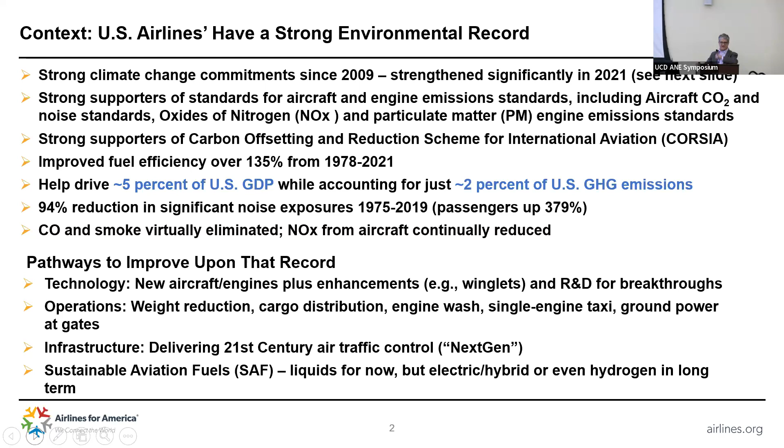So we've got some basic ways forward here that should be fairly familiar to folks about how we attack environmental impacts. That's improved technologies, improved operations, improved infrastructure. But what I'm going to talk to you about is SAF, Sustainable Aviation Fuel.

Just to let you know, in the background here, we adopted a net zero carbon goal in 2021, in March of 2021. So it's a net zero carbon goal by 2050. And that initially was accompanied by a goal to reach 2 billion gallons of sustainable aviation fuel by 2030.

And the reality is that is the best lever we have to reducing emissions going forward. Operations will help, technology will help, but when you look at what's really going to bend the curve down towards zero, it's ultimately going to be a lot of SAF. So in September of that year, we also then increased that goal to 3 billion gallons of cost competitive SAF in 2030. And we really led the world in doing this.

So the IATA, the International Air Transport Association, followed later in September, and actually the US government just adopted a net zero carbon goal later as well. And the International Civil Aviation Organization, ICAO, adopted a net zero carbon goal, an aspirational goal, just in October of last year.

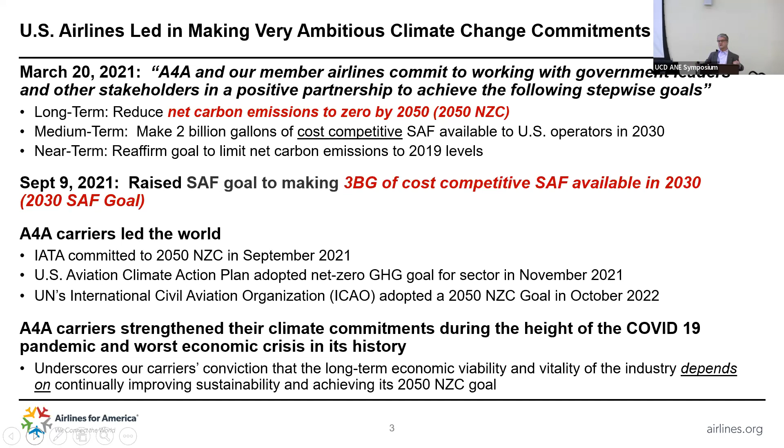So another point here is we were doing this during COVID, which was really one of the worst economic times for our industry. And when COVID first hit, the thought was perhaps that there would be less pressure across the industry and not just aviation. And people would think, well, maybe environment needs to take a bit of a back seat as we recover. Nothing could be further from the truth. We just re-upped our commitment to the environment, understanding that we need to make sure that as we progress economically, that is in lockstep with progressing environmentally as well.

So you see here, this puts our net zero carbon goal and the relationship to our SAF goal in perspective. We're talking about a really, really difficult goal to achieve. We had about 15 million gallons of SAF produced in the United States last year, or available to carriers in the United States last year. So to get to 3 billion gallons, do the math, 200-fold increase. It's 94% increase every year from now through 2030.

I always joke, if I could find an investment like that, I sure wouldn't be here. I'd probably be somewhere else enjoying the fruits of the investment.

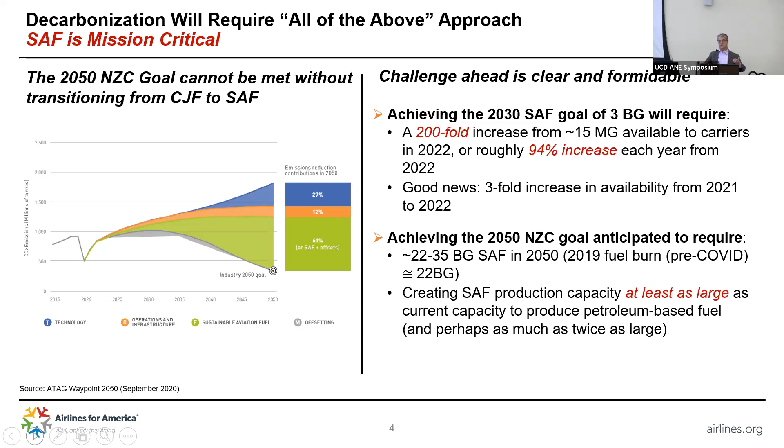But so this is going to require getting about 22 to 35 billion gallons of SAF by 2050 to meet our net zero carbon goal. So we're talking about creating a production industry that's at least as large as the production that we have of traditional fuel today. It's a huge undertaking, but one that we're absolutely committed to.

The good thing is that we're doing this in partnership with our friends across the aviation sector, including with consultations with environmental NGOs, aircraft and engine manufacturers, airports, but really the government needs to be a strong partner to really make this happen. And thankfully, we're totally aligned on what the goals should be, the net zero carbon by 2050 and the SAF goal by 2030 and beyond. And so we are definitely doing our part to try to make this transition.

We've got various carriers with goals of getting 10% of their overall fuel use powered by SAF in 2030. Some have even gone as far as 30%. We're already taking delivery of SAF, even though it's about 2 to 5 times more expensive than traditional fuel at the moment. We're working across our value chain to partner with our corporate customers and other customers to help find ways to better finance this, because it really is more expensive. So there are various things that we're doing to really press this along as much as we can.

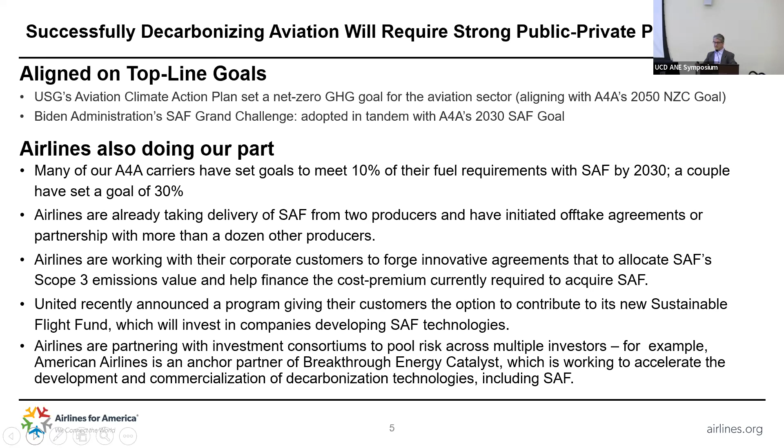As I said, there needs to be a strong partnership with the government. And as Don pointed out, in the Inflation Reduction Act, we got some really good incentives for SAF producers. So these are tax credits that go to the producers of sustainable aviation fuel. They get a tax credit of $1.25 per gallon that can rise to about $1.75 per gallon if that fuel achieves a 100% reduction in greenhouse gas emissions compared to traditional fuel.

You see that in order to even qualify, you need to have a fuel that reduces emissions by 50%. That's the basic threshold. And that's the basis of our goal as well. We're talking about using SAF that achieves at least a 50% reduction in greenhouse gas emissions from these fuels.

So there are also grant programs that were included in the Inflation Reduction Act that help with SAF. But frankly, this is a fantastic first step, but these will need to be augmented to really give SAF producers and investors the signals they need to make the decision to sink what really is going to be billions of dollars into this new industry. So we'd like to see these tax credits extended by 10 years from the time a facility goes into production. That's going to help draw in the private capital that's needed to really make this happen.

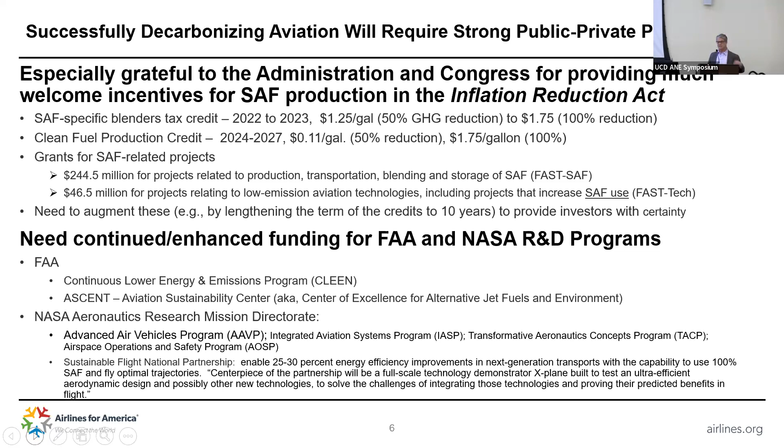So I just want to say that even with the transition to SAF, SAF basically allows you to reduce the life cycle carbon emissions from your aircraft. And you might think, well, then you can burn as much of it as you like. Well, the reality is, as we have been motivated for many, many years, we want to burn as little fuel as possible. If we didn't have to pay for fuel, that would be wonderful. So the least amount we can use is perfectly fine with us. So driving technologies which will improve fuel efficiency is really going to remain a primary focus of ours going forward.

In this context today, I did want to point out, and I think Shruti will get to some of this, that there's basically no sulfur in sustainable aviation fuel. There are also other components that are not present in SAF as well, a component called aromatics. Basically, it allows the fuel to burn more cleanly, so it produces less soot, which means less particulate matter. So that's a very good potential health benefit by ramping up our use of SAF.

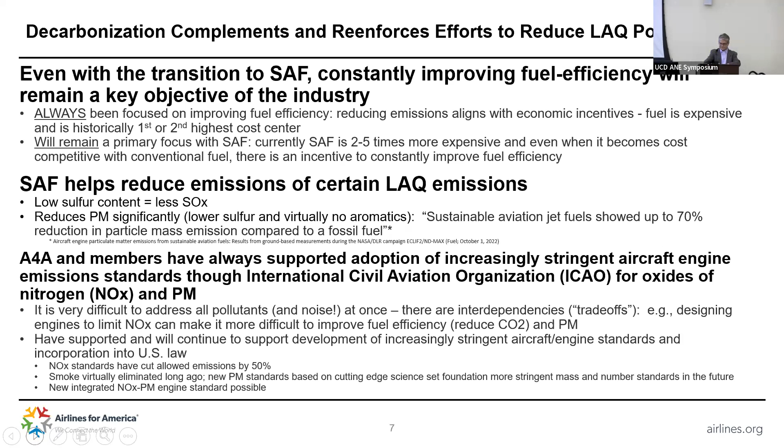Our next speaker is Dr. Shruti Mishra. She is a senior member of the technical staff at Sandia National Labs. She completed her master's and PhD degrees at the Ohio State University, where she trained as an applied economist. Her work includes energy economics and ecosystem services valuation. As a Fulbright scholar and employee at the U.S. Department of Energy National Labs, she's also worked for the U.S. Geological Survey and the World Bank.

Dr. Mishra works at the interface of energy, environment, climate change, and economic analysis, where she is coupling biophysical models with economic models to generate information on the economic costs and benefits of energy innovations. Her analysis goals are to support the assessment of economic viability and environmental sustainability of energy technology and innovation. And in this symposium, she will share with us her recent work on the evaluation of the health benefits associated with the use of sustainable aviation fuel.

Hello, everybody. I'm working right now at Sandia National Lab, and at Sandia National Lab, they do a lot of work on these fuel molecules and techno-economic analysis, how to reduce the cost, how to improve the molecules itself, how to do the LCA, life cycle analysis. So they are doing work on different aspects of sustainable aviation fuel. And the work that I am going to present is a very small part, just looking at the health benefits of sustainable aviation fuel.

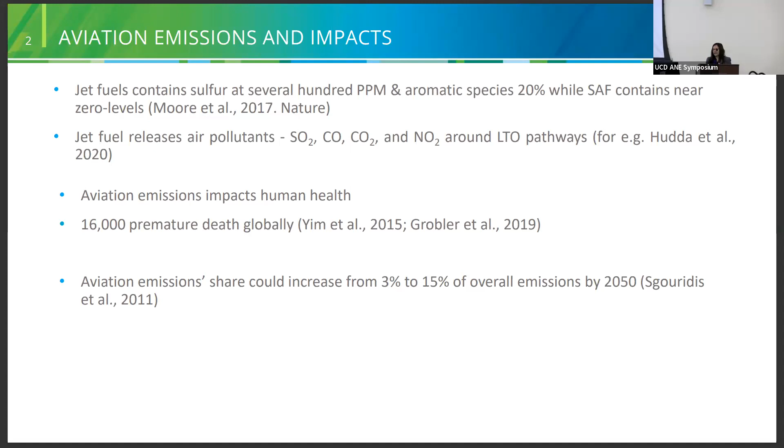There are a number of studies which have already quantified how many premature deaths happen because of these aviation emissions, and also in the context of increasing share of aviation emissions from 3% to 15% of the overall emission, it's important to look at whether and how sustainable aviation fuel can be a part of the solution.

A number of studies have quantified how blending of sustainable aviation fuel into jet fuel could reduce air pollutants. For example, Benosa et al. quantified under different blending, 50% and 100% blending of sustainable aviation fuel produced from different conversion pathways, how much of particle number emission can be reduced. So it goes all the way from 20% to 90% reduction.

And some studies from Harvard, such as Arter et al., have quantified how the reduction in air pollutants by SAF use leads to reduction in mortalities and morbidities. So the benefits of sustainable aviation fuel not only include the decarbonization or reduction in greenhouse gas emissions, but also the co-benefits, which are health benefits from improved air quality in the LTO pathways.

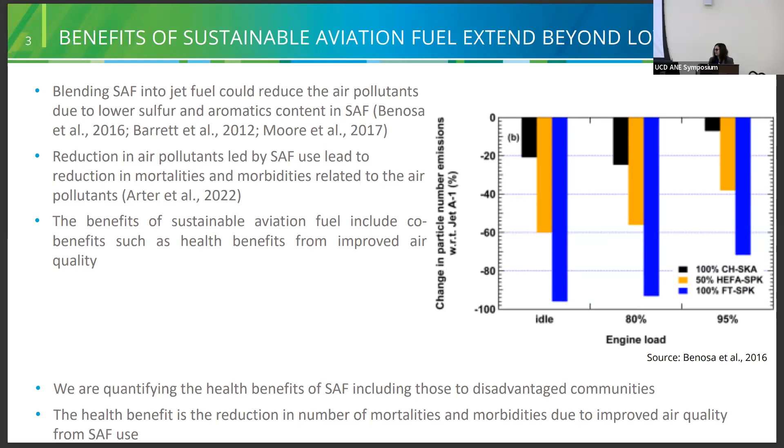So today we are going to present how we can quantify the health benefits of sustainable aviation fuel. And we also try to disaggregate those benefits to the disadvantaged communities as well. And by health benefit, we are looking at the reduction in the number of mortalities and morbidities due to the improved air quality from SAF use.

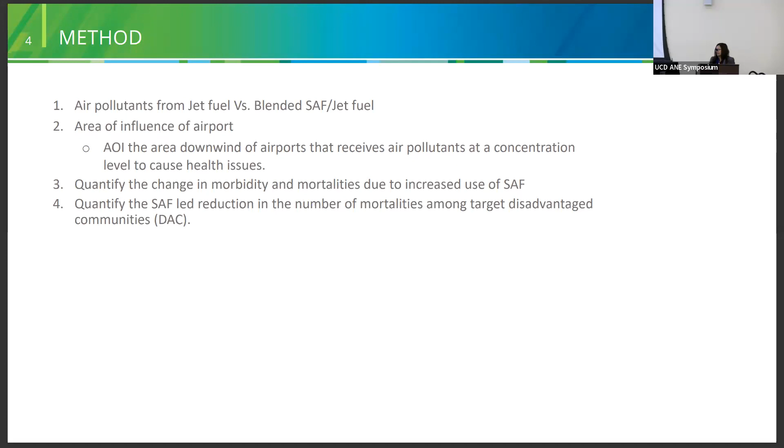So we developed this method, which has 4 main components. We try to quantify the air pollutants from using jet fuel versus using the blended SAF and jet fuel at various proportions. Second part, we try to look at the area of influence. Third part, we try to quantify the change in mortality and morbidity due to increased use of SAF. And fourth part is the quantification of SAF-led reduction in the number of mortalities, including those in target disadvantaged communities.

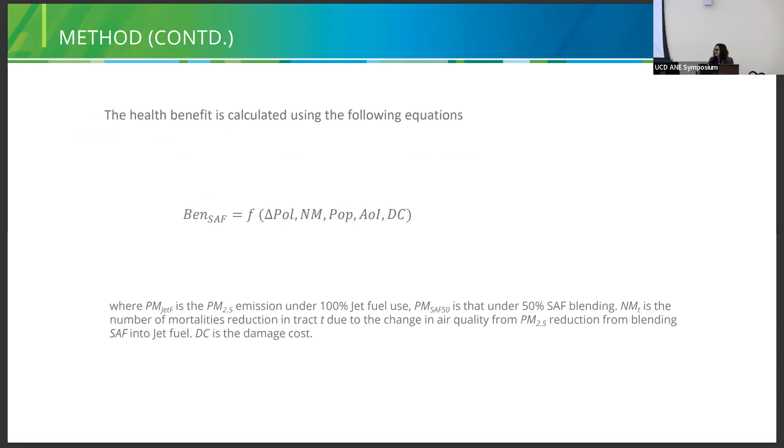So this is the equation we used to calculate the health benefit, which includes the change in pollution, change in the number of mortalities around the population living in the area of influence, and the damage cost. So we are going to look at each of these components one by one.

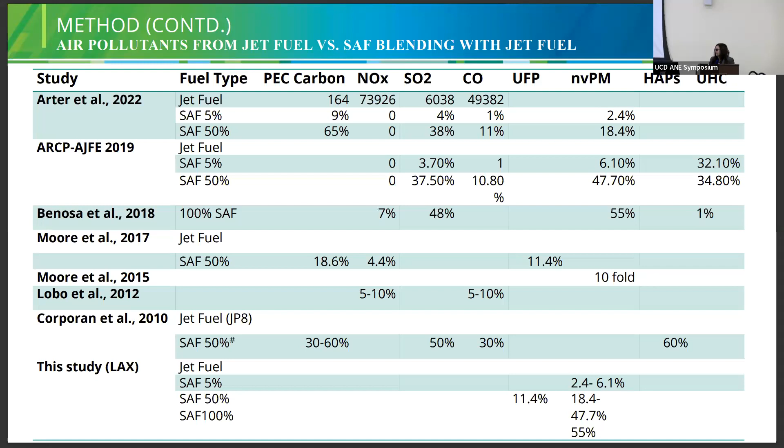So initially, we thought maybe we could use the results from other studies, but then we also found this airport air quality manual, which is developed by ICAO, and they use this first order approximation method to quantify the emission indices. So we tried to use the same method to first quantify the total baseline particulate matter from the airport around the LTO pathways of that airport. And then we also calculated the particulate matter from SAF using the same equation, where we used the value of fuel sulfur content as 0.

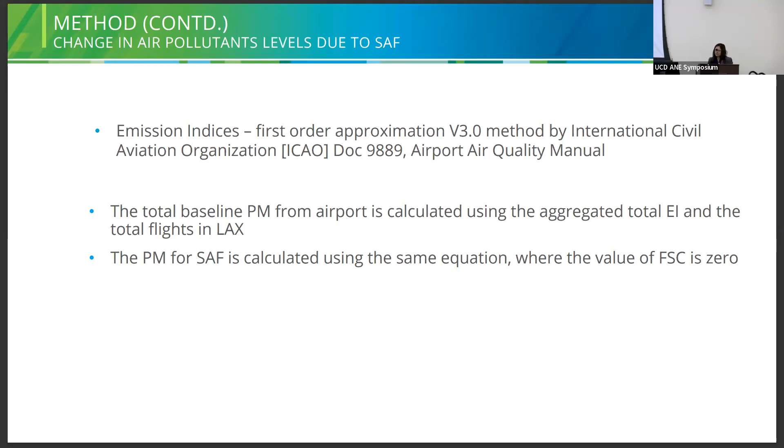In terms of the area of influence, prior studies have found anywhere from 7 kilometers to 40 kilometers as the area of influence for the particulate matter emissions and its impacts. So we use 10 kilometers to 40 kilometers downwind of the airport as our area of influence.

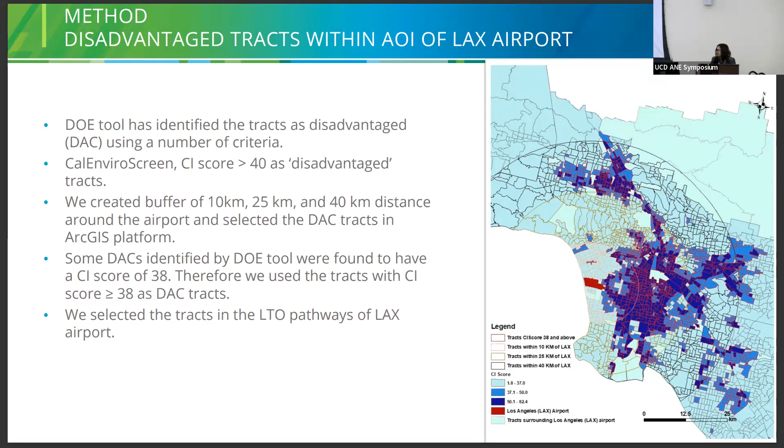The last one is the damage cost. So there is this standard method, the state-of-art method for assessing the value of premature mortalities, this is the value of statistical life, and that is developed by Environmental Protection Agency. This is not the ideal way. We can't tag the dollar value, but this is what we have.

And I'm trying to use what is available to at least have some sense of what is the damage cost of air pollution. And then if we can reduce some mortalities using SAF, that would be the avoided damage cost. So that would be the benefit, health benefit from the sustainable aviation fuel.

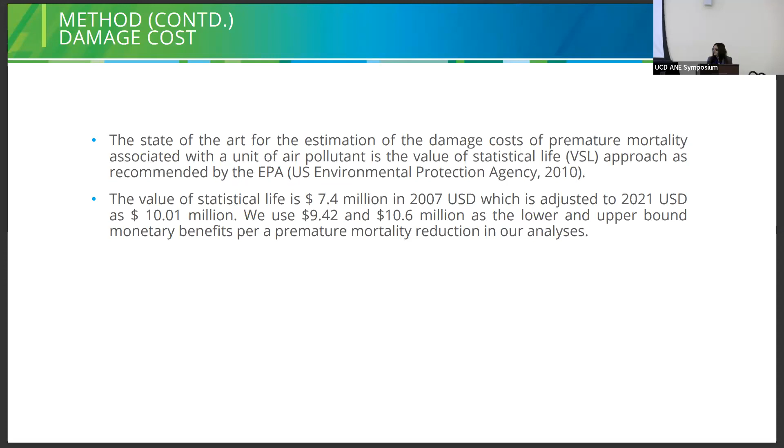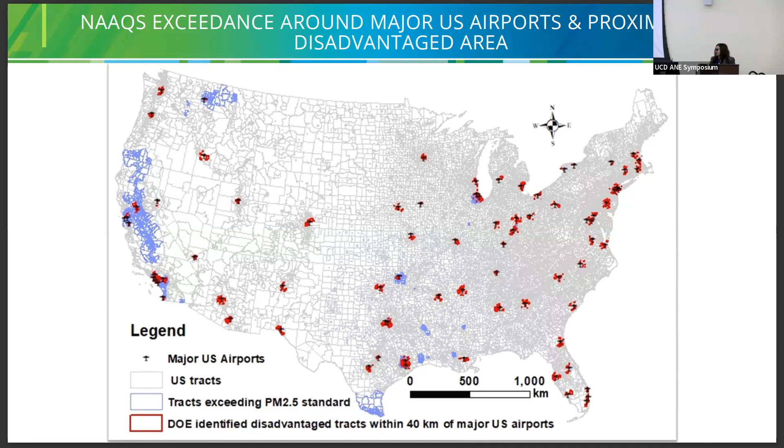We try to just look at where these disadvantaged tracts are located in the context of the major US airports and the tracts that are exceeding the National Ambient Air Quality Standard. And as you can see in this figure, there are a number of airports, specifically in the Midwest and the western part of the US, where we see a remarkable overlap between the tracts that are exceeding the National Ambient Air Quality Standard and the location of the airport, and also the location of these disadvantaged communities.

So today I am going to share the preliminary results from one of the airports, that is the Los Angeles airport. This is the average emission from landing and takeoff that we calculated. We have it for different stages of landing and takeoff cycle. We also try to quantify if we use 50% SAF blending for the total quantity of fuel used for the Los Angeles airport, how much particulate matter could be reduced.

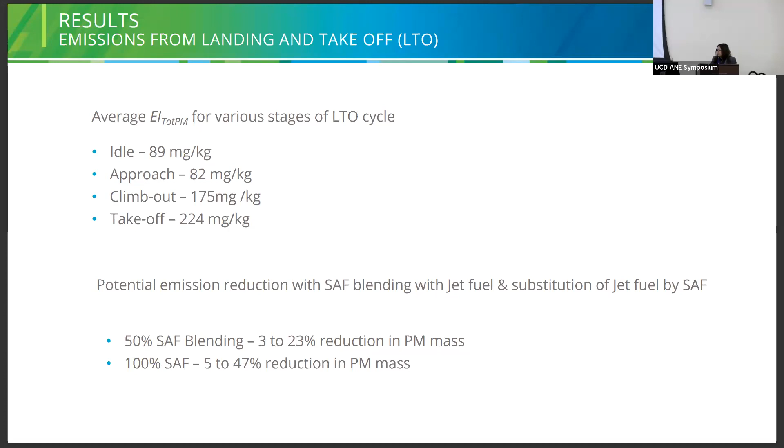So we found anywhere from 3 to 23% reduction in particulate matter mass if we have 50% SAF blending in LAX. And with 100% SAF, we get to 5 to 47% reduction in particulate mass. In terms of the disadvantaged tracts within the area of influence, we identified respectively 182, 775, and 1123 tracts that are identified as disadvantaged within the 10 kilometer, 25 kilometer, and 40 kilometer of LAX airport. For our further analysis, we try to use only those tracts which exceed the National Ambient Air Quality Standard.

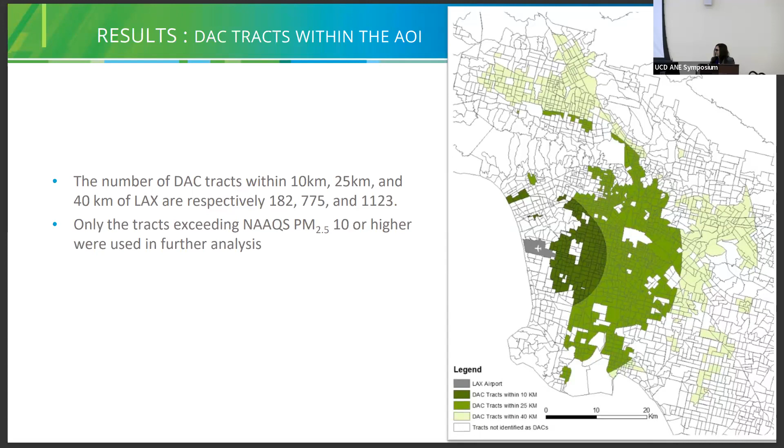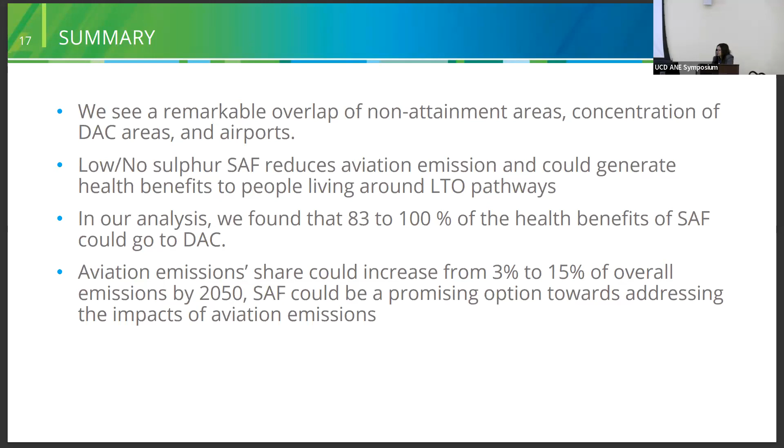First question is to Mr. Pohle. How does the 3 billion gallons of SAF manufacturing goal compare to the total fuel consumption in aviation?

Okay, thanks. It takes me a while, but I appreciate it.

Roughly 10 to 12%. It's projected to be about 10, 12% of predicted uplift in 2030. Jet fuel. Of jet fuel. Yeah, we have Avgas folks on this panel too, so. Yeah, so 10 to 12% of the projected total use of jet fuel in 2030 is SAF if they can get to the 3 billion gallon goal. Correct.

Next question will be for Dr. Mishra. You shared economic impacts to emissions. Do other organizations, for example, the FAA, support economic implications in evaluation such as what you've shared? Does the FAA also use monetary methods to evaluate benefits? That may not be a question that you can answer, so that's okay. Yeah. I would like to deflect that question to FAA people. Yeah, is there anybody from FAA in the room that could provide an answer?

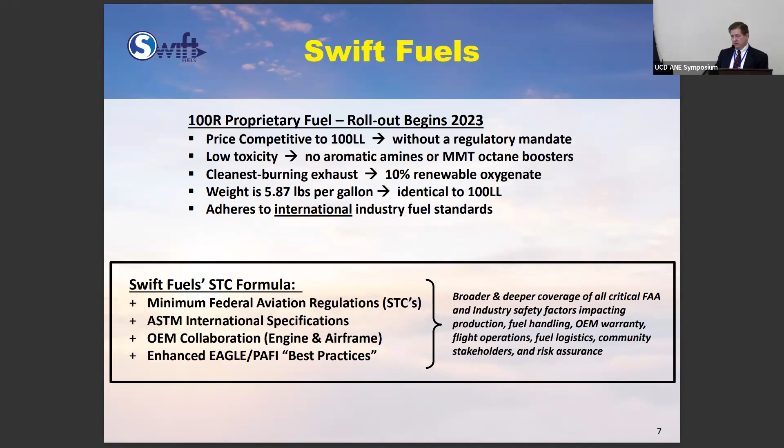So our high octane fuel, which we've been working on with a serious intent for probably 3 to 4 years now, it's running the same path. Okay, it's going to be equally cost competitive. It's going to be equally low toxicity. It's going to be the cleanest burning of the fuels. Why the cleanest? That's because it has an oxygenate in it. It's got an oxygen compound that complements the hydrocarbons that are in it so that when it combusts, it's the cleanest combustion of all the candidates.

And because of that, we get a better production on power. We get better emissions out the tailpipe. It's equivalent more or less. It's not the same thing, but it's equivalent to like ethanol and gasoline. Ethanol is also an oxygenate so that when it's like 10% in E10 gasoline, when it combusts, it tends to improve the combustibility of what happens in the piston, in the cylinder, such that it makes cleaner combustion. Well, ours does the same thing, but it doesn't use ethanol. But it is a 10% renewable component. It's not SAF, but it's 10% renewable.

Yay. Cleanest burning avgas, also the same weight, 5.87 pounds per gallon. And it adheres to the same kind of ASTM International standards. It's another important point. The United States has environmental standards that we think are important. Well, so does Europe, and so does Japan and China and Latin America and other parts of the world. But sometimes our international standards are out of sync with some of theirs. And now what we're trying to find is the most compatible solution that's compatible with everybody's international standards, so they'll all buy into it. Why? Because low lead is used worldwide and everybody wants the lead to go worldwide. So you got to find a solution that's worldwide compatible, and that's what this point is trying to make. At the bottom of the slide, this is really complicated, but you're bearing with me so far.

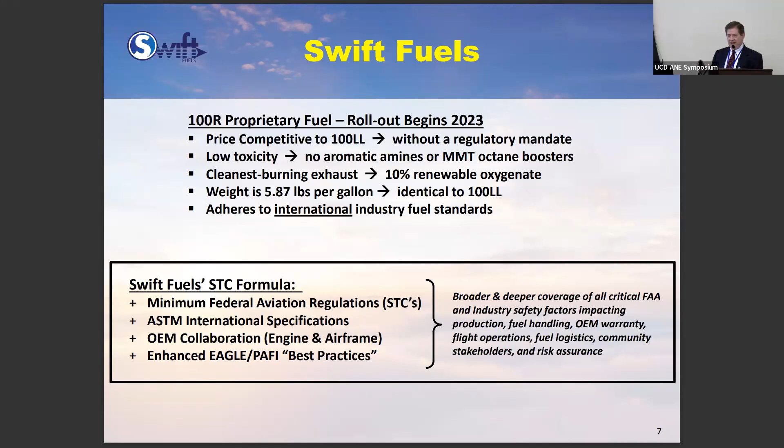I don't think ASTM is important. I don't think the OEMs are important. I don't think any of that other stuff's important. I just think the FAA is the only one that should vote. Well, guess what? It isn't quite that simple. And that's why we're doing the broad, deep way to do it. Does that make sense?

So we hire experts of all different fields. I employ probably 3 or 4 or 5 pilots on any given day because they're all in different stages of their certification as pilots, but a number of pilots that fly airplanes. We have 3 PhD chemists. We have a significant amount of engineers, most of them from Purdue, that are part of our employee set.

And then we have contractors that are experts in their field, some of whom are actually called designees from the FAA. They're certified by the FAA to work with companies like ours to get us over the hurdle. And that's what they're doing. And then we engage with the FAA on a regular basis. The FAA assigns a certification office as the leader of our work. And so we work with them on a day in, day out basis. And those designees help guide us, keep us between the rails, in terms of how we go about doing the work.

So, for the last several years, we've been the chief architect of getting unleaded avgas into the market. We're working diligently as the sole provider. We have been for the last 8 years. We're engaged in continuing collaborations with all these FBOs that I mentioned. We're planning a rollout of our high octane fuel, hopefully later this year.

It's not totally up to me. I mean, the FAA has to be ready. The ASTM has to be ready. There's third parties that are participating, but they all know that I've publicly said it's our intent to have this out later this year. So that's what we're trying to do. We're engaged in collaborations with Eagle. You're going to hear from Robert in just a second. He'll talk about the FAA.

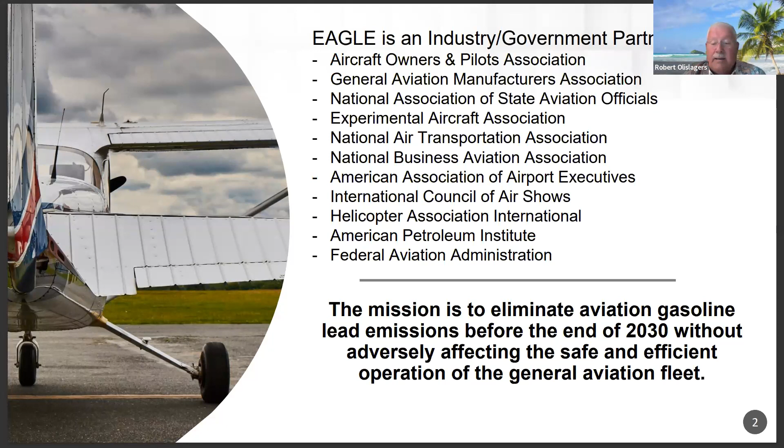EAGLE, as you can see, has 9 aviation associations representing probably 98% of the general aviation community, as well as the American Petroleum Institute, which is a big partner in EAGLE, and of course the Federal Aviation Administration. If we can go to the next slide, we're set up into 4 different groups. On the left side, in light blue, we call them pillars: the supply chain, infrastructure and deployment pillar, and the research and development and innovation pillar, which are basically managed by industry. And then on the right, the darker blue pillars: unleaded fuel evaluation, authorization, and regulation, and policy and programmatic activities. These are all interdependent, and I basically do the coordination between the activities of all 4 pillars. It's really just a great program.

I've been managing airports. The last airport I was at was Centennial Airport. I believe there are 2 Centennial Airport members in the audience right now. It was a sincere privilege working in the airport industry. So it's been a bit of a learning curve for me. But let me explain a little bit about what we're doing with all of these pillars, and how they operate and interact with each other.

So the supply chain infrastructure pillar obviously looks at the supply chain itself, literally from the refineries to the distributors, blenders, and airports, and then ultimately FBOs, and then fuel going into the wings. It's a process that has been tried, tested, and true. It works very well. Certainly Swift is part of that whole process, and we're just very excited. In fact, Centennial Airport tomorrow will be unveiling its UL94 unleaded fuel, so pretty excited about that. The R&D pillar focuses on new technologies to improve operating efficiencies, but also if the octane levels fall short of where we need to be, especially for the high compression engines.

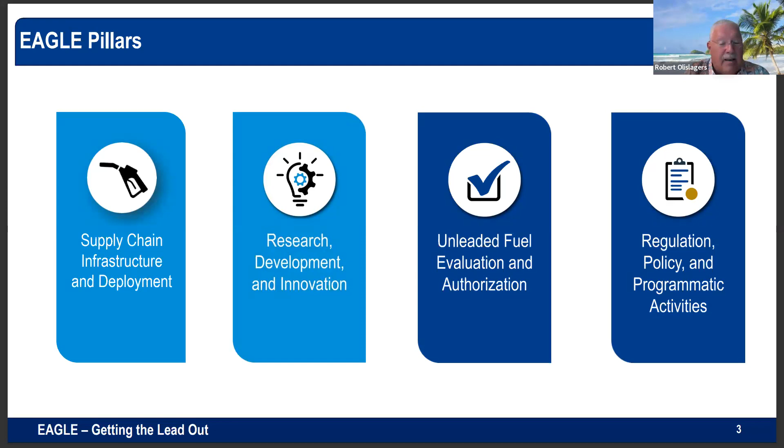I want to just briefly mention, Chris mentioned we've got about 220,000 aircraft, 223. Numbers vary a little bit depending on what database you're looking at. It's a $245 billion annual industry and employs about 1.2 million employees. There's about 5,000 public use airports, 3,500 that sell 100 low lead at present, and that's our target audience, obviously. Incidentally, there's about 20,000 landing facilities in the United States. A lot of these include helipads for oil rigs and for hospitals, law enforcement facilities.

Chris mentioned about 70% that can use the lower octane because they have the lower compression engine, so they don't require quite as high an octane. Think of it in terms of you buying 87 octane that Chris mentioned, which is regular fuel, versus say 91 to 93, which would be described as premium fuel. So you can kind of see the difference between higher performing engines versus the lower compression engines.

Having said that, that 70%, 68%, only use 25% of the total fuel volume in the United States. And the other 30% roughly will need the 100 low lead or an equivalent unleaded fuel that will get at least up to 100 octane plus fuel. So they're the bulk of the users of fuel today.

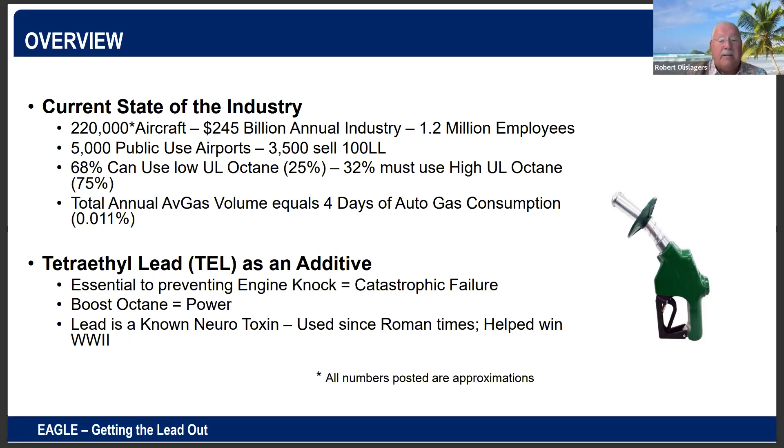So next slide, please.

So why now? The EPA proposed an endangerment finding last year in 2022 towards the end of the year, and we are anticipating that there will be a positive endangerment finding regarding lead in piston engine fuel. So once that positive endangerment finding comes out, that triggers a number of statutory and regulatory requirements, including proposed rules that will include public hearings, cost-benefit analyses, et cetera.

It may even, as happened in the automobile industry, involve some lawsuits. So each of these steps is expected to take several years. And so when we looked at the 2030 date from the aviation side to make that transition, that was kind of a target date. However, we are very keenly interested in finding a solution prior to that. And as you heard from Chris, hopefully his 100R will come out in 2023. So we would already be looking at making those transitions.

So let's talk a little bit about the alternatives that we're looking at right now that were mentioned here before. There are two pathways. One is the Piston Alternative Fuels Initiative, or PAFI, and the other one, as was mentioned, is Supplemental Type Certification, or STC, or in this case also the approved model list, meaning very specific to certain aircraft engines and certain aircraft types. So it's important to understand that significance.

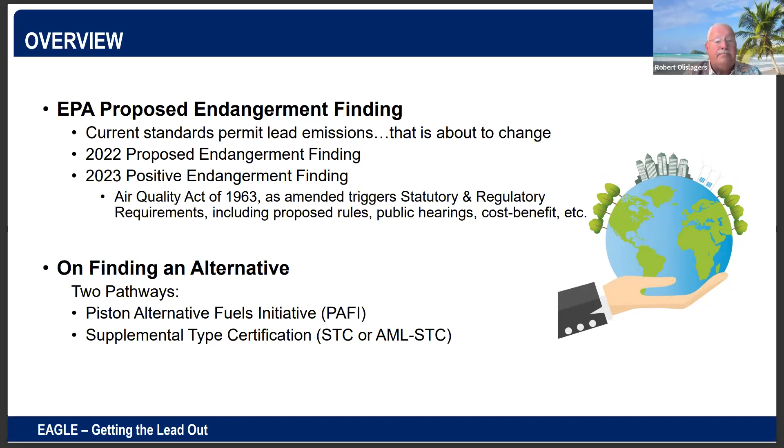And when Chris was talking about having that fuel for all aircraft, the PAFI program is designed to do fleet-wide authorization, meaning it would include all of the aircraft, including the ones that might be orphaned at this point. So if we can go to the next slide. As I mentioned, the PAFI program, which stands for the Piston Alternative Fuels Initiative. We're currently going through Gate 3, if you will, with both Afton Chemical and Phillips 66, as well as LyondellBasell and VP Racing. We expect that that process will be completed in July.

And we then hope to go to the next phase, which would be not only the mini durability and a mini detonation test, but we will go to full detonation, or at least by that time, the detonation issue should be resolved. But we'll be looking at the durability, which will probably involve at least 300 hours of operating requirements. So hopefully by July, we may have two more fuels in the hopper.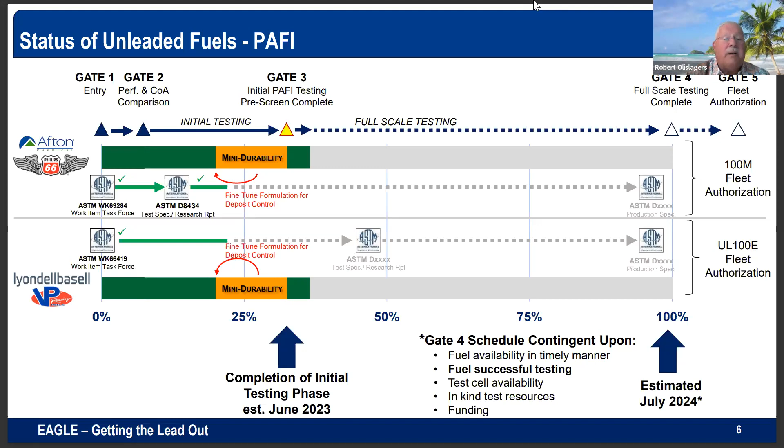Now, these two fuels are also going through the ASTM process, used to be called the American Society for Testing and Materials program. Now it's just simply called the ASTM. It is not a mandatory requirement, but it is highly recommended for the very reasons that Mr. DaCosta talked about earlier, and that is it sets the standards for quality. So currently there are two fuels in that program. So that's the PAFI program. If we can go to the next slide, we'll talk a little bit about the STC process.

So GAMI, or General Aviation Modifications Incorporated, received its AML STC certification on 1 September of 2022. The fuel is currently not yet commercially available on the market. It also does not have an ASTM approval. So Swift, which is in the STC program, does expect to get authorization in 2023 this year. And one of the interesting things is that the UL94 switch to 100R would be relatively simple. And Swift already having the distribution network and airports that are already using the UL94 unleaded fuel, I think that's going to be very important.

Most important from our perspective is that it expects to receive the ASTM approval, which is an international standard for how the fuel is blended and ultimately delivered into wings of aircraft. So those are those two pathways to success. We ultimately will have 4 fuels. However, given the market, as I mentioned earlier, about 0.1% of the total petroleum market, at least in terms of automobile fuel and avgas, is relatively small. So we don't think actually that it will support 4 different types of fuels, but that remains to be seen. So if we can go to the next slide, please.